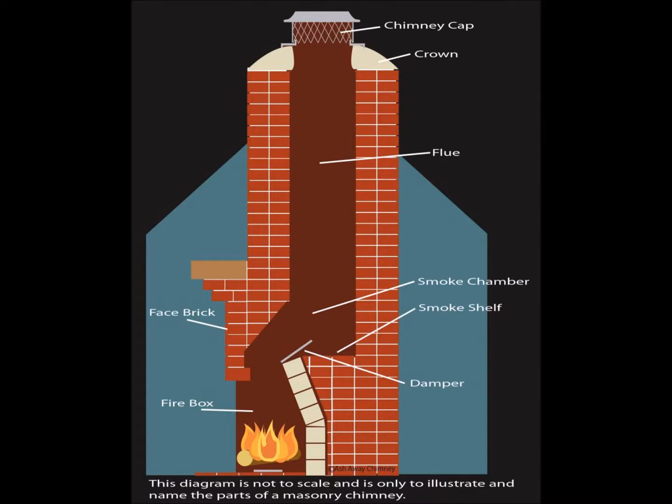Most older gas boilers and furnaces have what we call naturally drafting chimneys. The combustion gases exit the home through the chimney using only their buoyancy, combined with the chimney's height. Naturally drafting chimneys often have problems exhausting the combustion gases because of chimney blockage, pressures, or wind inside the home that can overcome buoyancy of the gases.

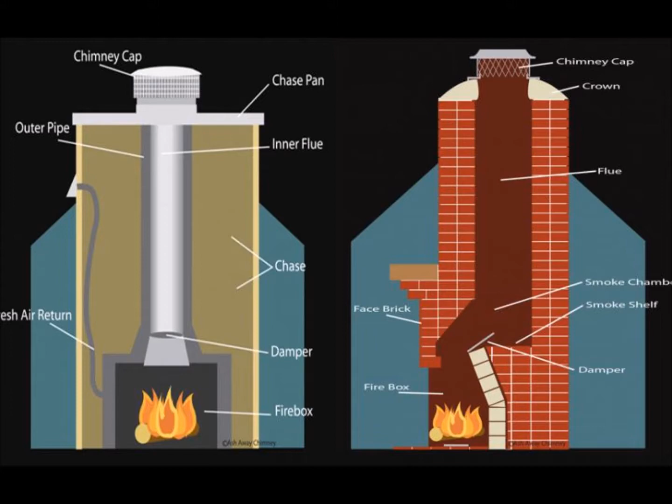Atmospheric open combustion furnaces and boilers, as well as fan-assisted furnaces and boilers, should be vented into masonry chimneys, metal double-wall chimneys, or another type of manufactured chimney.

Masonry chimneys should have a fire clay masonry liner or a retrofitted metal flue liner. It's not that unusual to find that many older chimneys will have deteriorated liners, or maybe no liners at all, and must be relined during furnace or boiler replacement.

A chimney should be relined when any of the following changes is made to the combustion heating system: when a homeowner replaces an older furnace or boiler with a new 90% or more AFUE appliance or a heat pump. In this situation, the heating appliance will no longer vent into the old chimney, and the combustion water heater will now vent through an oversized chimney.

This oversized chimney can lead to condensation and inadequate draft. The new chimney liner should be sized for the water heater alone, or the water heater in some cases can be vented directly through the wall.

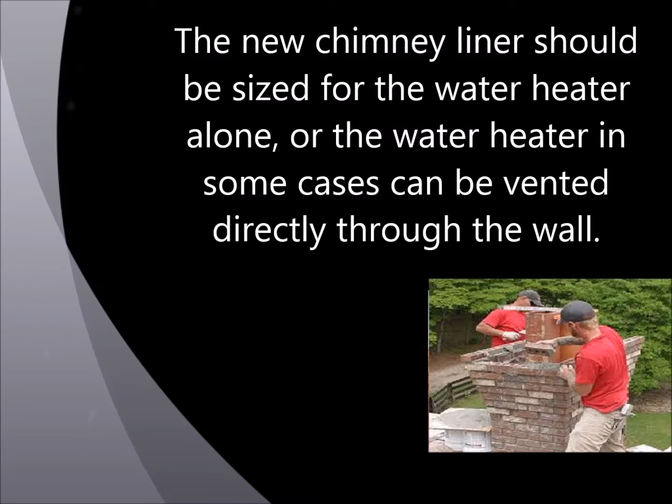Or when a homeowner replaces an older furnace or boiler with a newer one that has an AFUE of 80% or more. These mid-efficiency appliances have a greater risk of depositing acidic condensation droplets in chimneys, and the chimneys must be prepared to handle this corrosive threat.

The new chimney liner should be sized to accommodate both the new heating appliance as well as a combustion water heater by the installer.

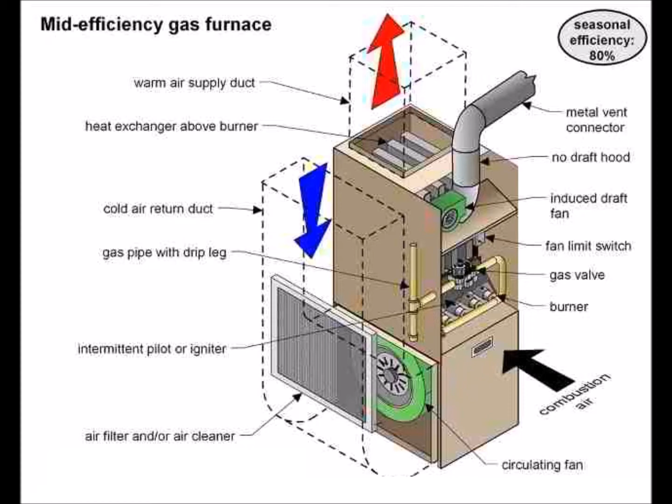You may also run across some fan-assisted, non-condensing furnaces and boilers that were installed in the late 80s or early 90s. They could be vented horizontally through high-temperature plastic vent pipes, but not PVC pipe, which is safely used in condensing furnaces. This type of venting has been recalled and should be replaced by stainless steel vent pipe. If horizontal venting was used, an additional draft-inducing fan may be needed near the vent outlet to create an adequate draft.

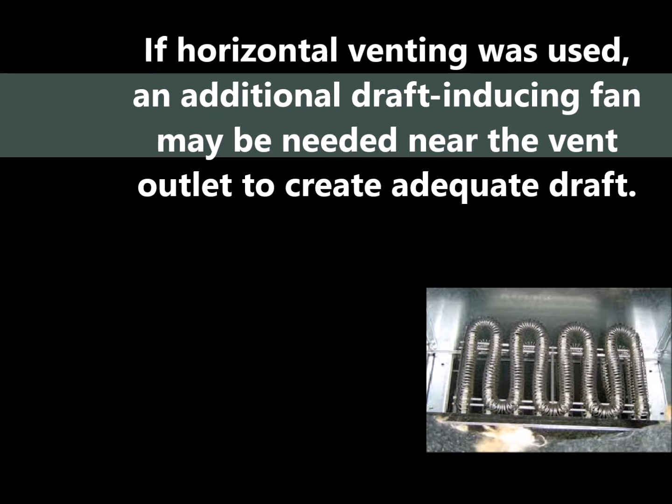Floor furnaces may have special venting problems because their vent connector exits the furnace close to the floor and may travel 10 to 30 feet or more before reaching a chimney. Check to see if this type of venting or the floor furnace itself needs replacement.

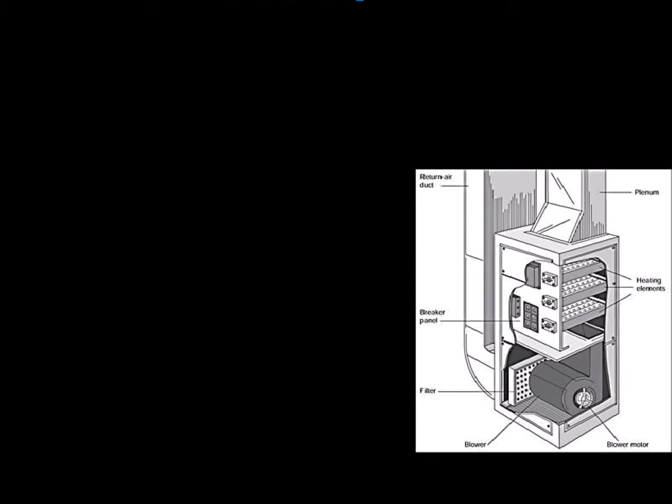While you're doing your inspection, if you happen to smell gas, you definitely have a venting problem that could affect human life or safety. Contact the local utility or heating contractor to have this checked out immediately. Let's take a look at electrical resistance heating.

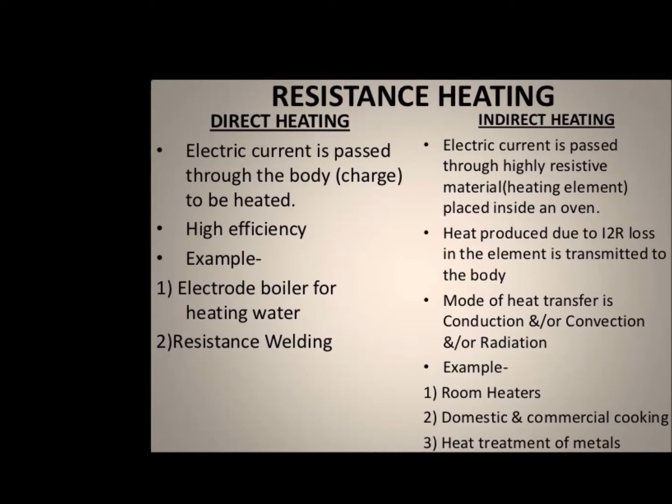Electric resistance heating converts nearly 100% of the energy in the electricity to heat. However, most electricity is produced from oil, gas, or even coal generators that convert only about 30% of the fuel's energy into electricity. If electricity is the only choice, heat pumps are generally preferred in most climates, as they easily cut electricity use by almost half when compared to electric resistance heating.

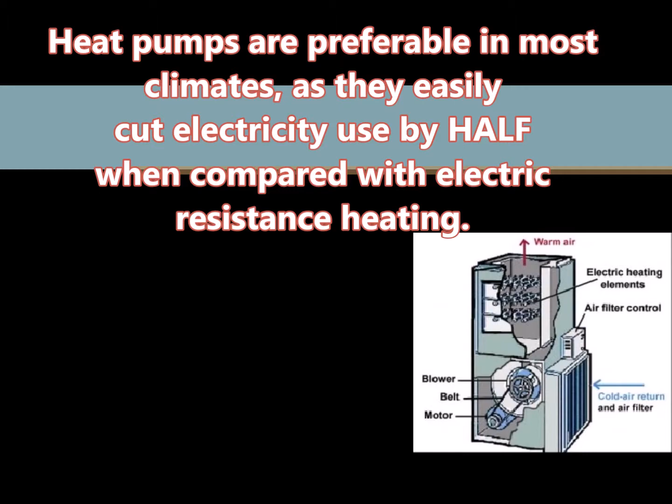The exception is in dry climates with either hot or mixed temperatures. These climates are primarily in the southwest United States as well as parts of Texas. For these dry climates, there are so few heating days that the high cost of heating is not economically significant.

Electric resistance heating may also make sense for a home addition if it's not practical to extend the existing heating system to supply heat to the new addition.

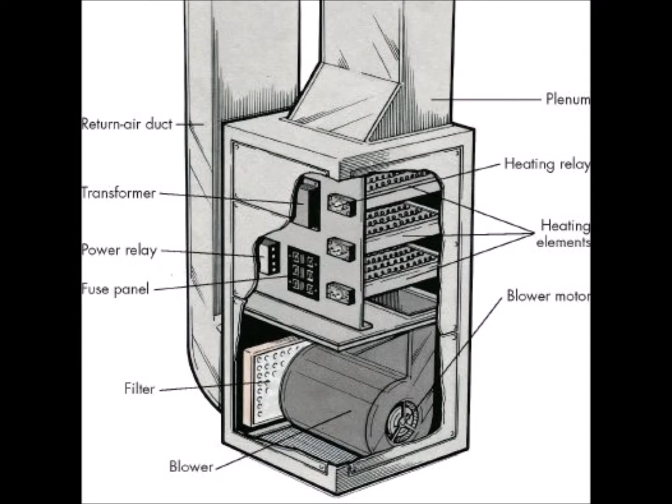Electric resistance heat can be supplied by centralized forced air electric furnaces or by heaters in each room. Room heaters can consist of electric baseboard heaters, electric wall heaters, electric space heaters, or electric radiant heat. It is also possible to use electric thermal storage systems to avoid heating during times of peak power demand.

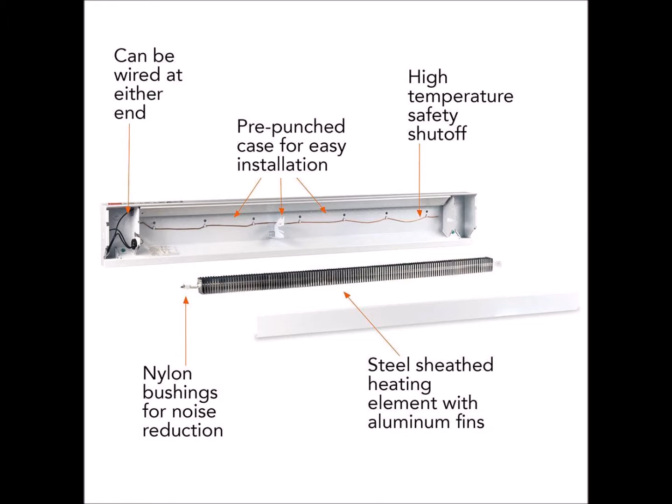Electric furnaces are more expensive to operate than other electric resistance systems because of their duct heat losses as well as extra energy required to distribute the heated air throughout the home. Heated air is delivered through the home using supply ducts and then returned to the furnace with return ducts. If these ducts are run through unheated areas, they lose some of the heat through air leakage as well as

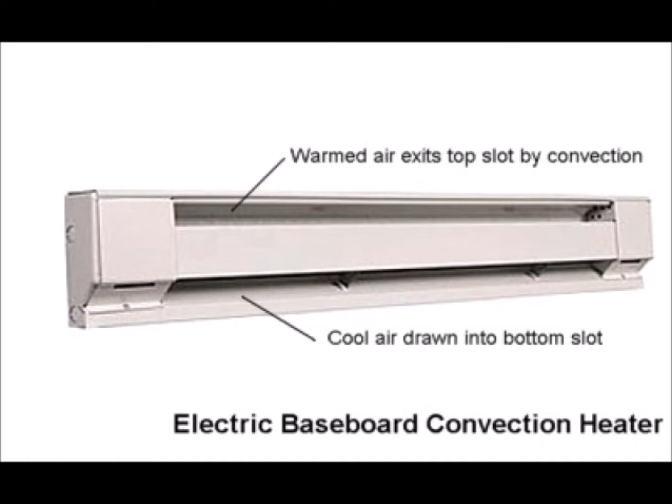heat radiation as well as convection from the duct surface. Blowers, or large fans in electric furnaces, move air over a group of 3 to 7 electric resistance coils. These are called elements, each of which is typically rated at about 5 kilowatts.

The furnace's heating elements activate in stages to avoid overloading the home's electrical system. A built-in thermostat called a limit controller prevents overheating. This limit controller may shut the furnace off if the blower fails or if a dirty filter is blocking the airflow. But keep in mind, with any furnace, it's important to clean or replace the furnace filters as recommended by the manufacturer.

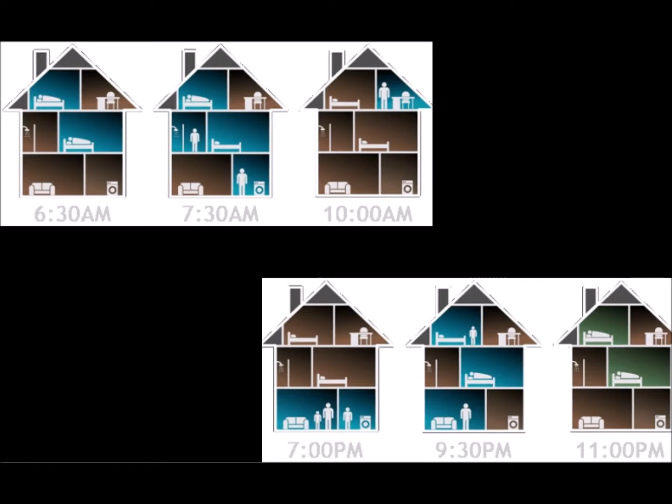Electric baseboard heaters are zonal heaters controlled by thermostats located within each room. Baseboard heaters contain an electric heating element encased within metal pipes. The pipes, surrounded by aluminum fins, help aid heat transfer and run the length of the baseboard heater's housing or cabinet.

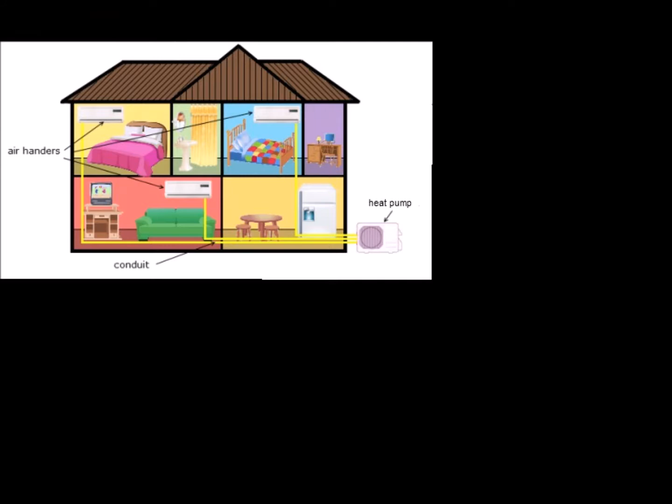As air within the heater is warmed, it rises into the room and cooler air is drawn into the bottom of the heater. Some of the heat is also radiated from the pipe, fins, as well as the housing.

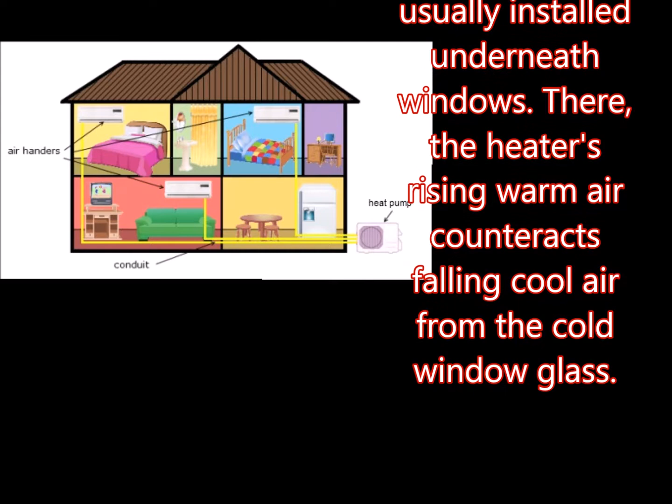If installed properly, baseboard heaters will usually be found underneath windows. There, the heater's rising warm air counteracts falling cool air from the cold window glass. Baseboard heaters are seldom located on interior walls because of standard heating practices to supply heat at the home's perimeter where the greatest heat loss occurs.

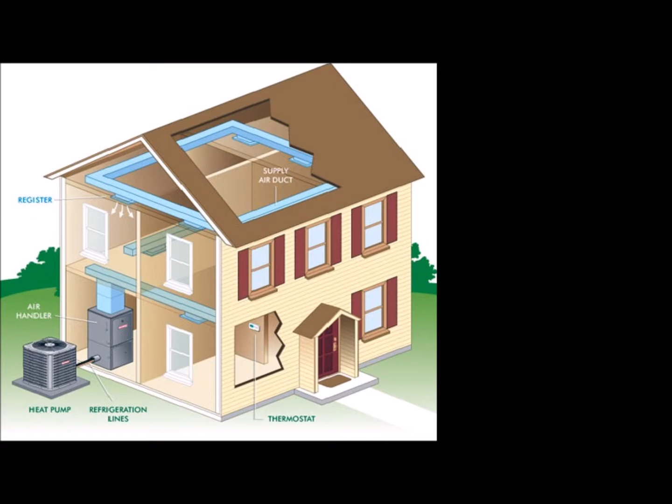Baseboard heaters should sit at least 3/4 of an inch above the floor or carpet. This will allow the cooler air on the floor to flow under it, and through the radiator fins so it can then be heated. The heater should also fit tightly to the wall to prevent the warm air from convecting behind it and streaking the wall with dust particles.

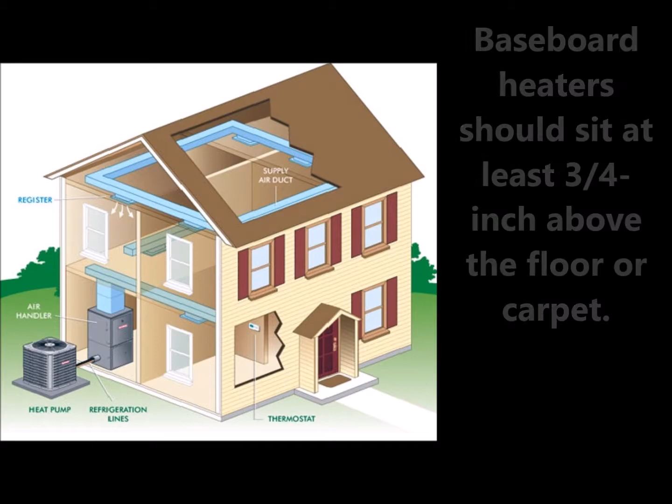Electric wall heaters consist of an electric element with a reflector behind it to reflect heat into the room and a fan to move the air through the heater. They are usually installed on interior walls because installing them on exterior walls makes it difficult to insulate.

If electric cost per kilowatt hour is lower in the evening, your client could benefit from a heating system that stores electric heat during evening hours when rates are lower. We call this an electric thermal storage heater, and while it does not save energy, it does save money because it can take advantage of the lower evening rates.

The most common type of electric thermal storage heater is a resistance heater, with elements encased in heat-storing ceramic. Central furnaces that incorporate ceramic blocks are also available, although they are not as common as room heaters. Storing electrically heated hot water in an insulated storage tank is another thermal storage option.

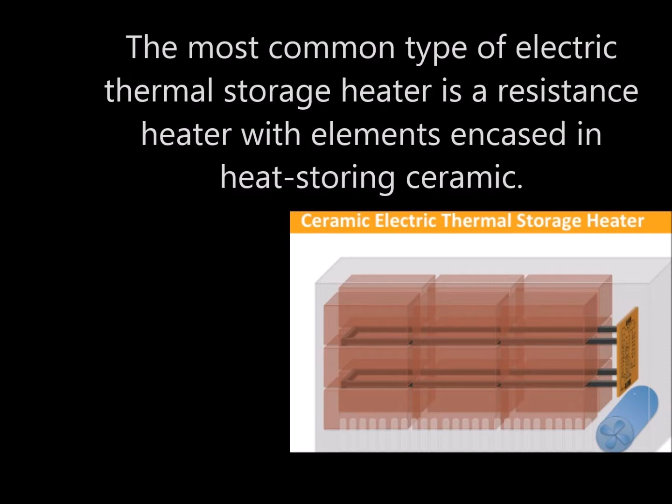All types of electric resistance heating are controlled through some type of thermostat. Baseboard heaters often use a line voltage thermostat, while other devices use low voltage thermostats. Line voltage thermostats can be built into the baseboard heater, but they often don't sense the room temperature accurately.

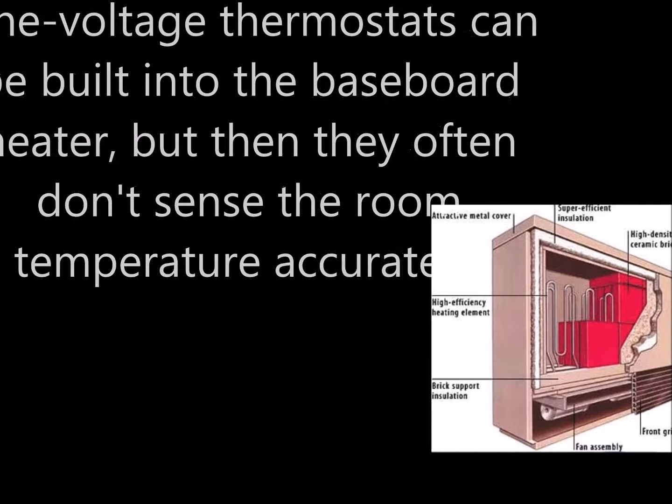Since baseboard heaters supply heat to each room individually, they are ideally suited for zone heating, which involves heating the occupied rooms in the home while allowing unoccupied sections to remain cooler. Zone heating can produce savings of more than 20% compared to heating both occupied and unoccupied sections of the home. Zone heating is most effective when the cooler portions of the home are insulated from the heated portions.

This way it allows different zones to operate independent of each other. You should note, however, that cooler parts of the home still need to be heated to well above freezing temperatures because you don't want pipes to freeze.